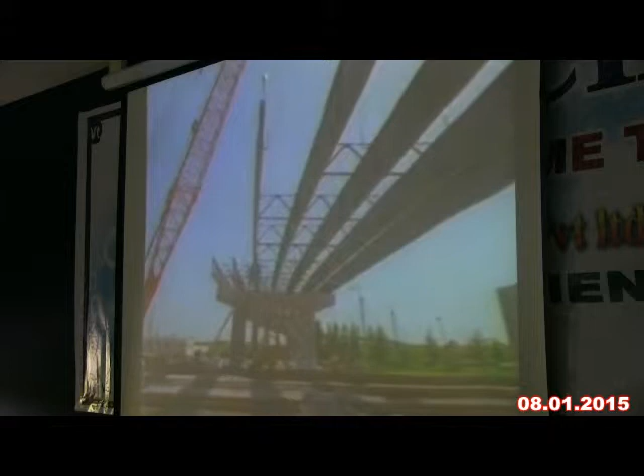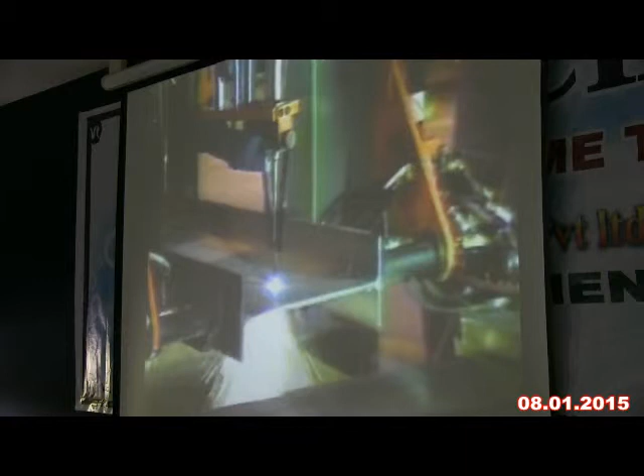Steel is light, yet it is strong enough to stretch across great distances with longer spans. Steel gives designers and engineers the ability to fulfill their most imaginative concepts with structures that would be impossible to build with anything else. Steel is not only durable and economical, it allows existing structures to be altered or expanded for new or greater uses. And because fabrication can be precisely controlled off-site, steel is fast to build, much faster than other materials, and it is buildable in any season.

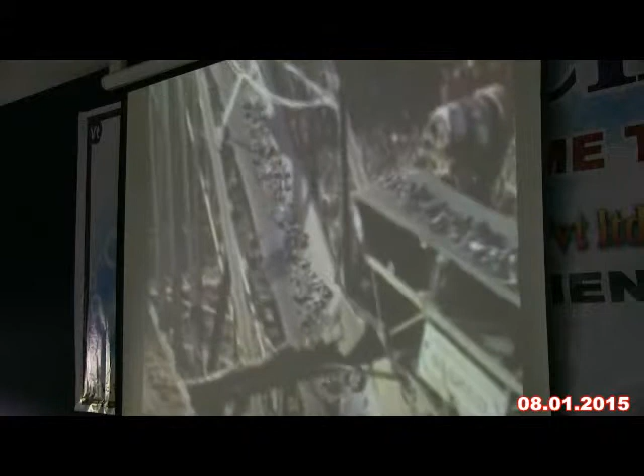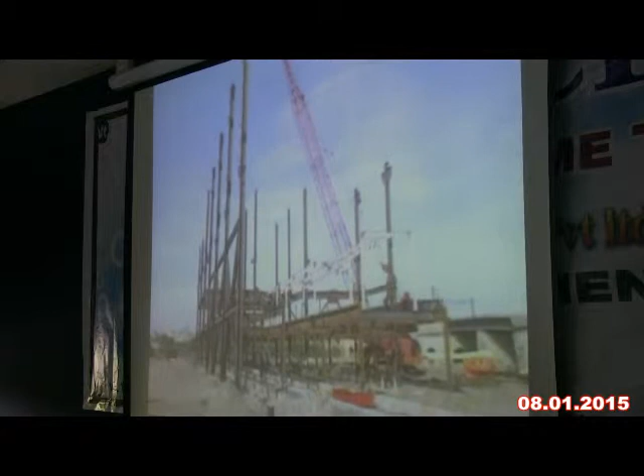Steel also helps preserve the earth because it is 100% recyclable, and it can be used again and again without losing any of its original strength. In fact, more steel is recycled than all other materials combined. Thanks to the power of contemporary electric arc furnaces, this scrap metal can be transformed into high-quality steel in little more than 3 hours. When it has been fired, refined, and processed, it can become powerful beams capable of supporting modern buildings or bridge spans.

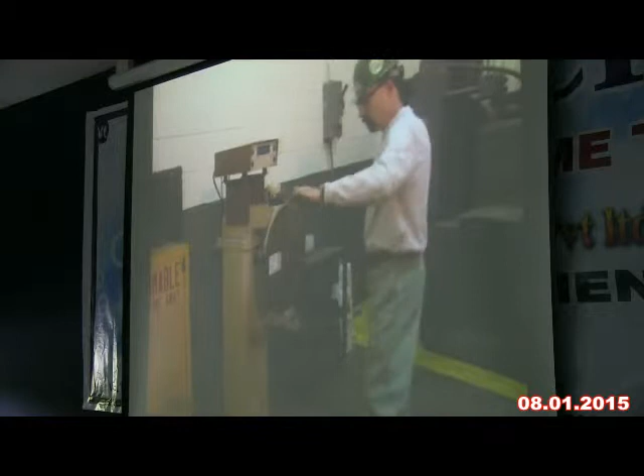This electric arc furnace, consuming about 75 megawatts of electricity, just melted about 125 tons of used cars and other forms of ferrous steel scrap in about 60 minutes. The electricity arcs between the carbon electrodes and the steel scrap in the furnace to produce a heat of molten steel. Once the scrap has been transformed into molten steel, specific alloys are added to create steel that has the exact strength and properties required for its future use. Each heat will meet the requirements of the steel specification ordered by the customer, related to the chemistry and composition.

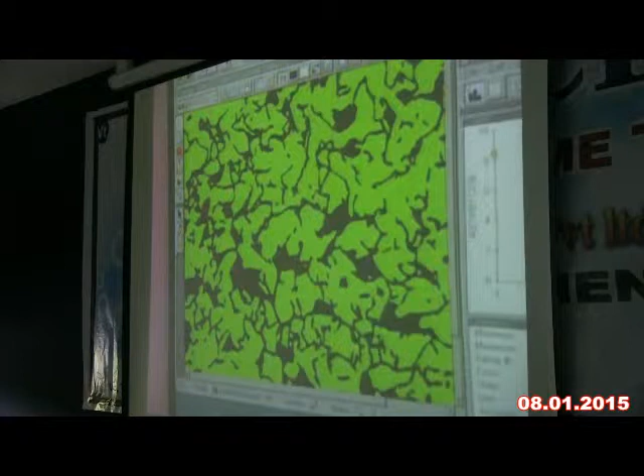Using electronic microscopes and spectrometers, inspectors scan the steel to ensure that every piece of steel has a uniform and consistent composition. Since the introduction of structural steel shapes, improvements in materials and design methods have made a profound difference. If the Sears Tower were built today, it would require 35% less steel than when it was built in 1974.

After the scrap has been melted, refined, and tested, the molten steel goes into a bathtub-like container called a tundish. The steel then moves through continuous casters, where it will be made into slabs, billets, blooms, near-net shapes, or beam blanks. In the continuous casters, the steel flows through nozzles into water-cooled molds, where it is cast into a continuous bar. When the steel comes out of the caster, it must cool to 1600 degrees in order to solidify.

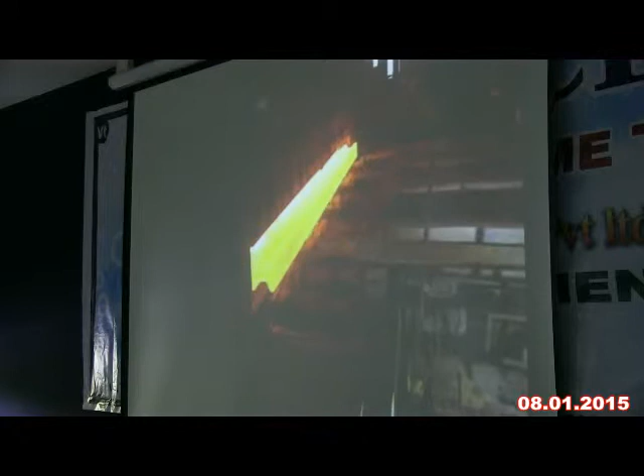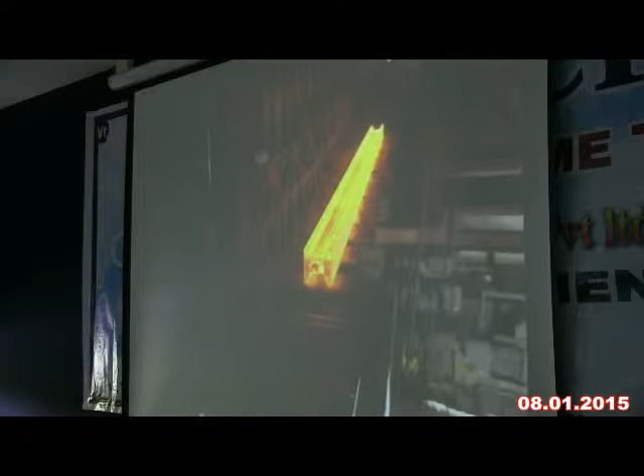When the steel is to be rolled or further processed, it will be brought back up to 2400 degrees before it completely cools, thereby saving the time and energy that would be required to reheat steel at a later time from room temperature. This process, like many others in the production of today's steel, is controlled by computer-driven equipment.

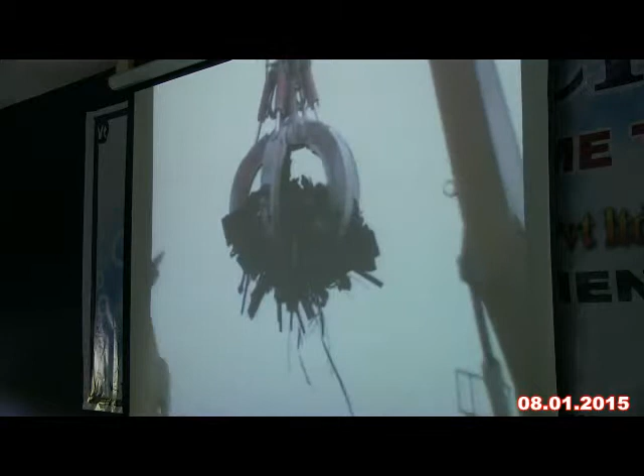The steel bar then goes through a straightener, and it will emerge as the finished product. Just think, only a little more than 3 hours have passed since this steel was scrap metal. It has been transformed into high-strength steel, saving our precious natural resources and preserving the earth through the use of recycling technology.

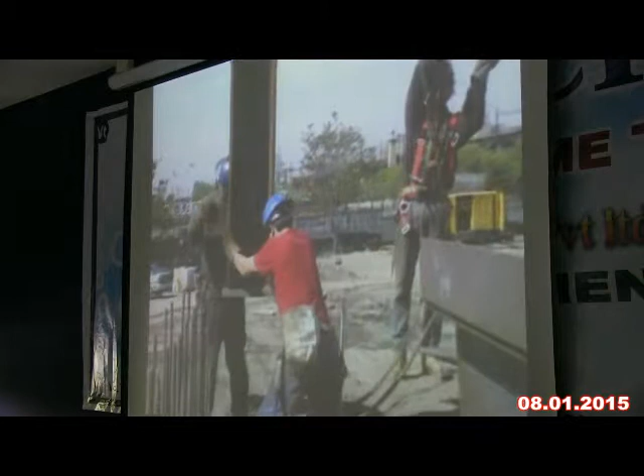After the steel has been produced, every piece of steel in a skyscraper or bridge must be precisely cut, its holes properly placed, its pieces welded in exactly the right location. Every single bolt in the structure must be located and attached at the proper place, and all this must be exact to 1/16th of an inch, so that the steel members will fit together perfectly at the site.

That's why a process called detailing is such an important and integral part of building today's complex steel-based structures. It is the detailer who must develop drawings that are so precise that they will show the fabricator the exact dimensions required for manufacturing the finished steel components that will go into the structure.

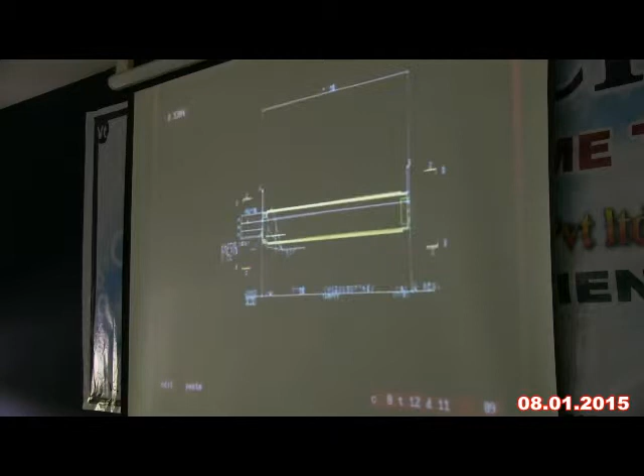To accomplish this formidable task, the detailer will take the design prepared by the structural engineer and on paper build a 2D or a 3D model of the steel frame of the building or bridge. It is from this model that the detailer will generate a complete list of every member in the structure, as well as shop drawings for all the individual steel pieces.

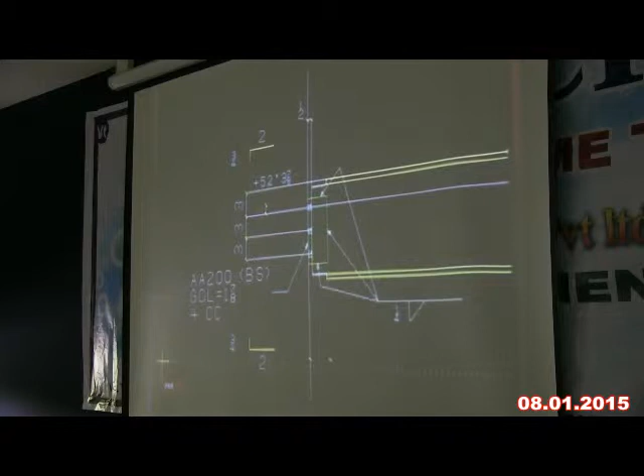To accomplish this process, the detailer must compute the length of the beams and columns, as well as the bolts and raw materials used. The detailer must also keep track of every hole in the entire structure. If a change is made in a beam connection or in the hole of one column web, it will be up to the detailer to indicate exactly how that change will affect all the holes in those beams.

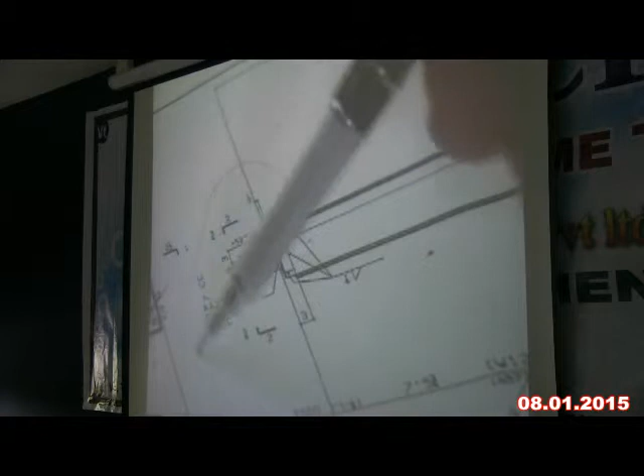In addition, if a member has been changed on the shop drawing, the detailer must also change the erection drawings that will be used in the field. All this information is developed with the help of computers, and it can be downloaded to the drill line in the shop or to the angle master to show them how to drill holes for the angles.

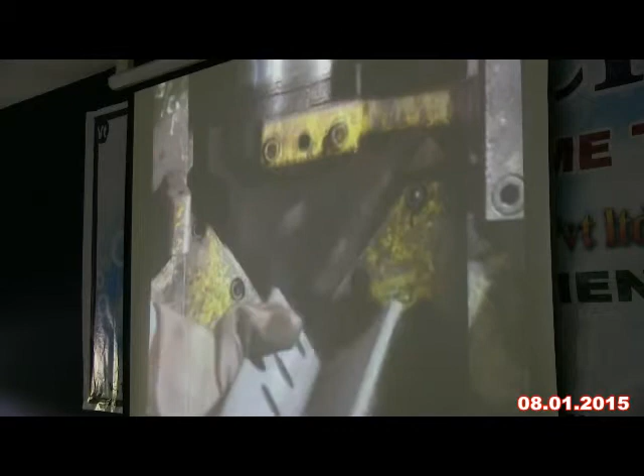But it's important to realize that although these critical tasks are done with the assistance of a computer, they are not done by the computer. The detailer's training, skill, and expertise is the key to the process. It is the detailer's ability to translate the engineering drawings of a large structure for the fabricator so that the fabrication shop will know exactly what must be done to prepare the steel.

The detailer will also indicate the preparation, cleaning, and painting of the materials depending on its specification. If that weren't enough, the detailer may also have to consider and take into account shipping requirements, sometimes even the cranes that will be used in the field, and how those cranes will load and unload members from the truck.

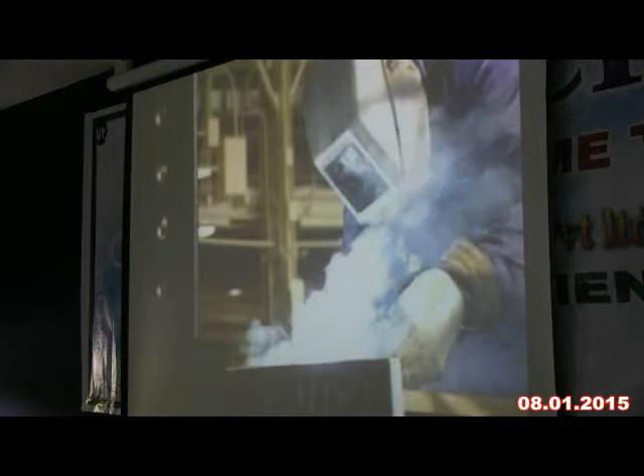Before the fabrication shop actually drills and cuts the steel members, the detailer must submit his shop drawings to the engineer of record for approval to make sure that the shop drawings are fully compliant with the engineer's design. It's clear that steel fabrication plays an important role in joining steel members, even before the beams and girders arrive at the construction site. This is one reason why on-site building with steel is so much faster than is possible with other materials.

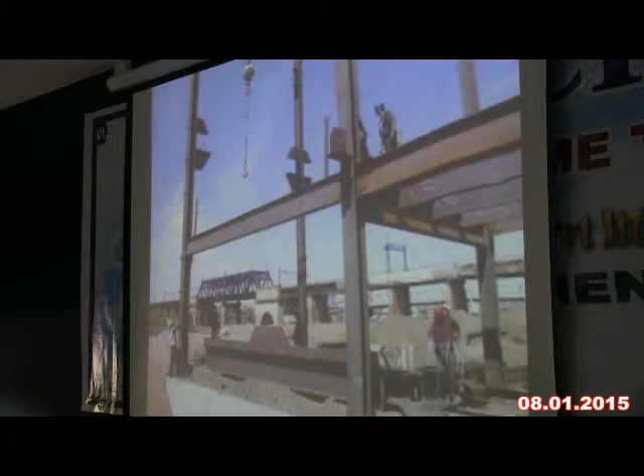At the fabrication shop, the steel is cut, punched, and pre-assembled as much as possible according to the detailer's drawings. These drawings can be used to generate computer disks that will drive the shop's fabricating machinery to cut and drill the steel with absolute precision.

If cutting is necessary, the operator inputs the size and the desired length of the member. The stock lengths of steel will enter the cutting machine by conveyor. An automatic arm stops the stock at exactly the right point, and the blade cuts the steel. The piece will then be labeled and rolled out.

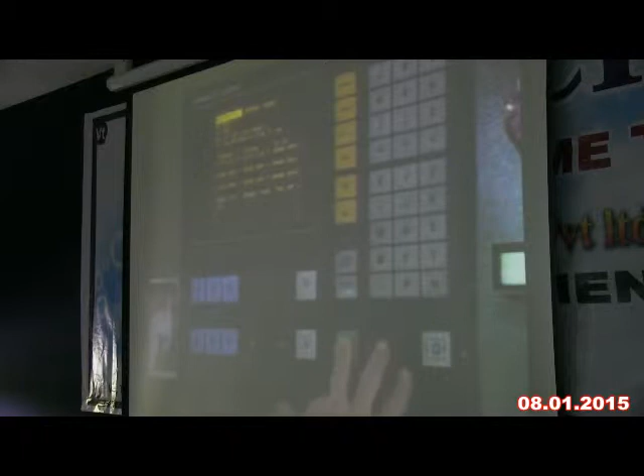From the cutting area, the steel members will travel on a conveyor to the next station, where holes will be drilled to make the bolted connections. Here again, these critical processes are precision controlled by computer. The machine operator inserts the disk into the computer as the member is fed through the drilling machine, pushes a few buttons, and the computer takes over.

As the steel automatically goes through the machine, its exact location will be monitored by laser measuring devices, so it will stop precisely where the holes must be drilled. All of the holes will be drilled in one pass as the column goes through the machine.

The operator is able to see different views of the member on a small monitor, noting the number, location, and size of holes needed, as well as the precise location of the drill bit. When the holes have been made, the member will travel on conveyor to the next station.

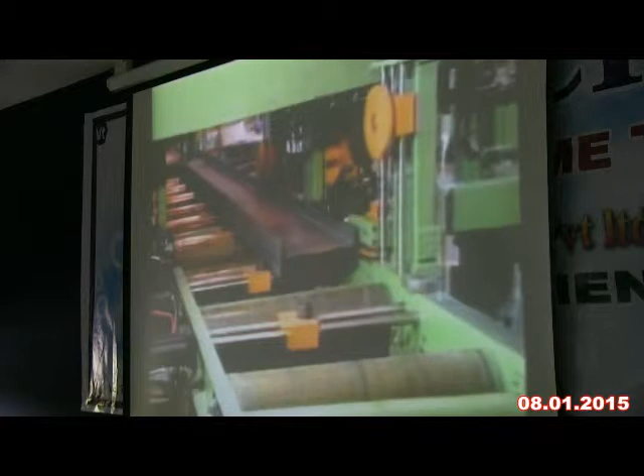The coping machine burns steel to cut members like a saw, or it notches the steel and makes holes. Here again, the operator inserts the proper disk in the computer to initiate the process, and the piece automatically stops at the location where the precise burning operations will take place. Usually, edges that are flame cut by the coping machine are smooth and require no additional work.

From here, the steel member goes to the layout station, where angles, plates, and other connection parts are bolted or tack welded. Today, high-strength bolts and welds have made joining steel members faster, more economical, and more reliable than ever before. If the piece needs welding, it will be taken to the welding area, where the welding can be done.

There are other areas in the fabrication shop where the pieces needed for joining steel members are produced. For connections that require angles, stock lengths of angles are automatically delivered to an angle machine, which will cut them to the desired length and punch holes at the appropriate locations in one pass.

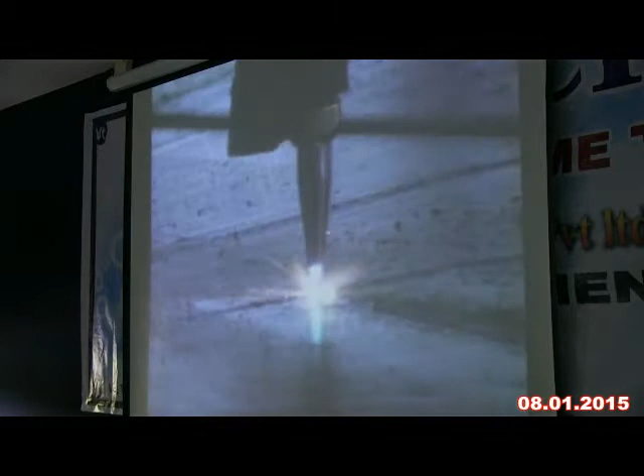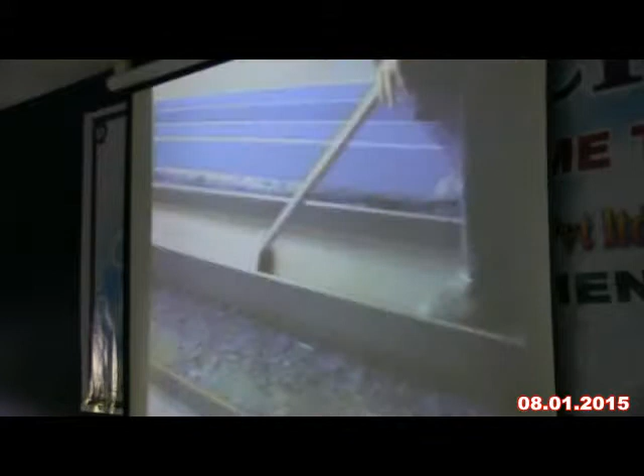Torch cutting plates is another operation performed by computer-operated machines in the fabrication shop. Shearing plates, punching holes, and bending steel members are other processes that take place at the fabrication shop. The piece may require cleaning and painting before being shipped.

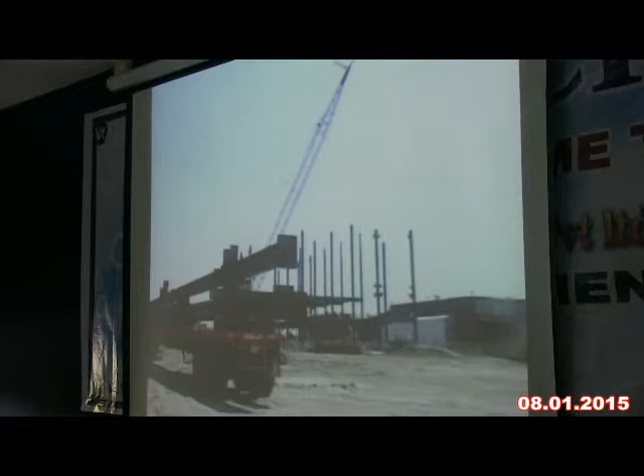When a piece has been through all the processing called for in the detailer's instructions, it is taken to the yard, loaded onto a truck, and transported to a job site or storage yard. Because there is often not enough space on the job site to store all the fabricated steel needed for the job, the process of delivering, hoisting, and placing steel has to be carefully planned so that the pieces will be delivered to the site in the order in which they will be erected.

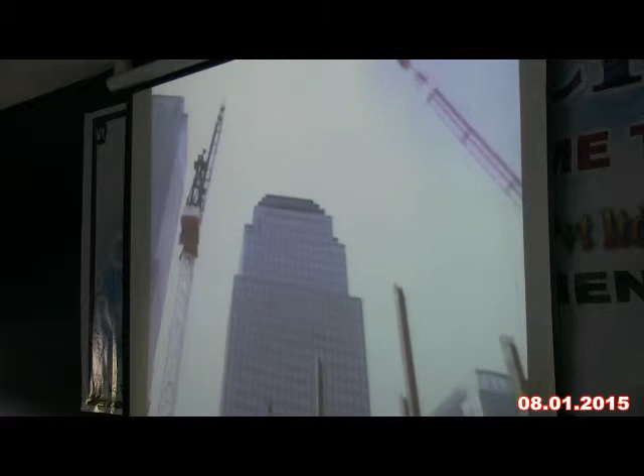Erecting a steel structure is a dramatic and often breathtaking process of assembling the fabricated steel members at the site. Frequently, these pieces will have to be assembled under difficult conditions, where it is not easy to maneuver them to align the holes and make the members fit. This is why precision in the detailing and fabrication processes is so important.

Typically, erection is done by lifting and placing the steel members in their appropriate positions, and then temporarily fastening them with several bolts or welds. At this point, the structure is capable of supporting only its own weight and cannot resist lateral loads. It must be temporarily braced so that it will not fall over during construction.

When a worker receives a member for erection, he lines up the holes by running a pin through them. Then he puts in several bolts and temporarily tightens them with his wrench. During this process, the crane operator plays a very important role. It's his job to deliver the steel to the exact location, often without being able to see it. At those times, he must rely on hand signals or radio.

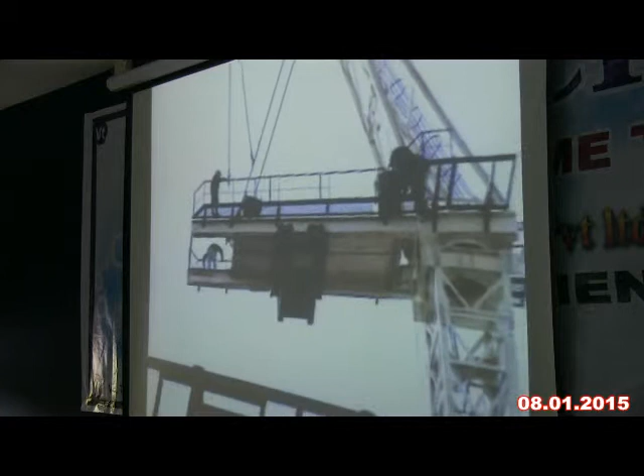When a section of the structure has been assembled, workers will permanently fasten the members with additional bolts and welds. The special wrench that these workers are using will stop automatically when the required torque is achieved, ensuring that the connections are strong. Erection of structural steel has always been challenging.

Many times workers have to assemble very heavy pieces at tremendous heights, with several pounds of equipment and supplies hanging from them. They may have to walk on steel beams hundreds of feet up in the air. But the industry keeps a strict eye on safety, and safety requirements require workers to wear fall protection harnesses that help make erecting structural steel safe.

The challenges of erecting steel structures aren't limited to safety issues only. Special conditions can require new and innovative techniques. For example, when extremely tall structures are being built, it may be impossible to find cranes that can reach the top of the structure from the ground. In such cases, self-lifting cranes may be used that can lift themselves as the construction proceeds.

In the case of the CN Tower in Toronto, the tallest freestanding structure in the world, a mast had to be put in place over 1,500 feet in the air. Lifting and erecting this heavy steel structure safely and accurately at such a high altitude in Toronto's cold winter was a tough problem. The solution was a helicopter. After several practices on the ground where pieces of the structure were pre-assembled, a special helicopter was used to lift and assemble the mast. This solution saved over 6 months of construction time.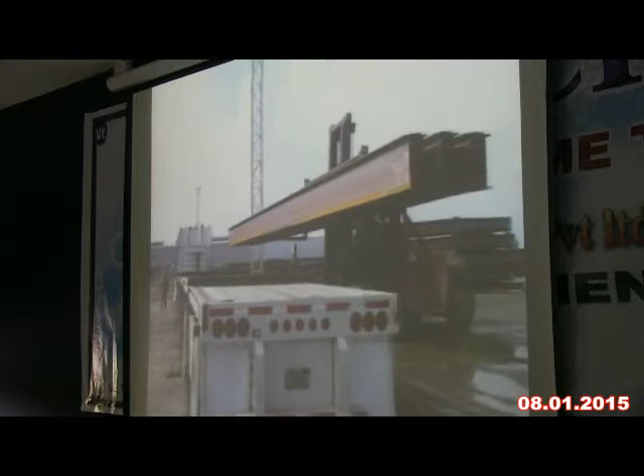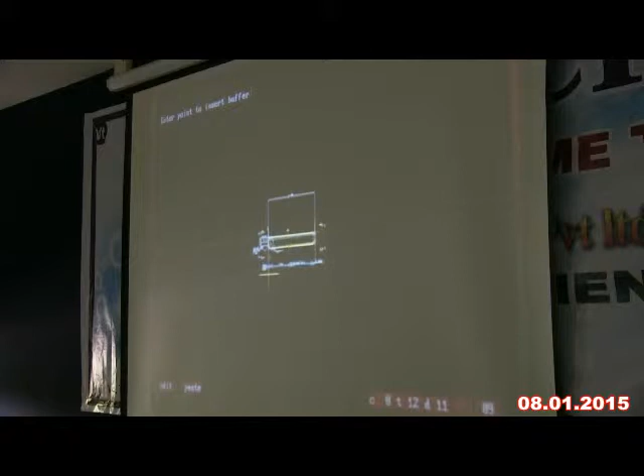Experts who can perform the complicated detailing that will transform an engineer's drawings into the specific requirements for each beam, column, and bolt. Then there are the experts in the fabrication shop who can transform raw material into fabricated structural steel. And the experts at the construction site who can erect the steel frames that form the core strength of buildings and bridges. These skilled people are all part of the team that share the excitement of building the miracles of the modern age.

All of you are familiar with drafting, right? And you also know about design. And the term detailing is something maybe new to you. Right? Detailing, have you ever heard about detailing? You may not have. And after seeing this video, now I hope you have some rough idea about what detailing is. So detailing is a kind of intermediary stage between design and fabrication.

It differs from drafting in the sense that in drafting you just follow, like an AutoCAD technician. So you will be simply drawing it. You may not be bothered about design aspects. Many companies will have draftsmen, and drafting is very old. It has got a good amount of history. So many times candidates graduated from ITIs and polytechnics do this drafting. Engineers do the design part.

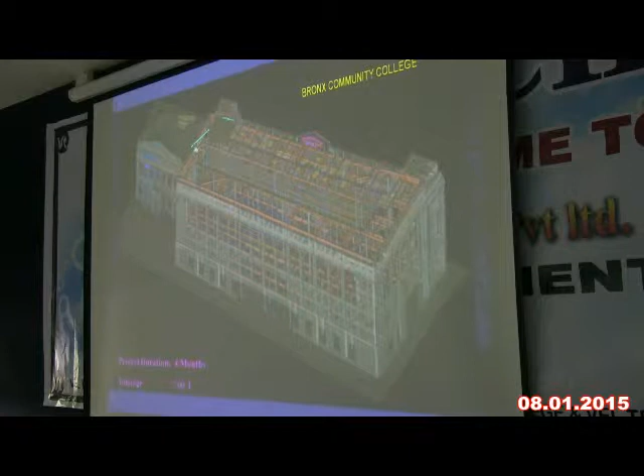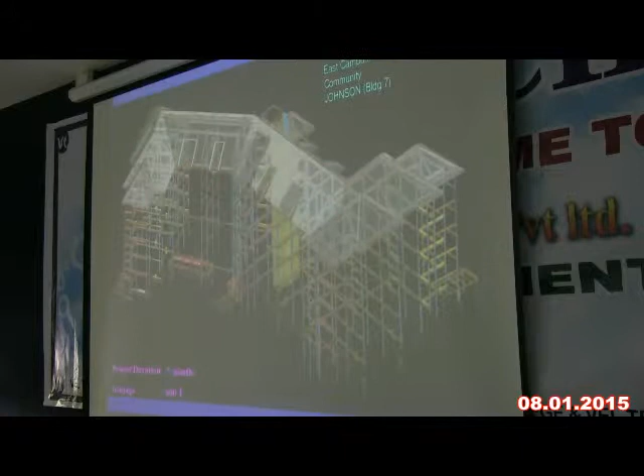We also have our presence in the US. We have sent people to give project support from the customer's place. You see the structural frame inside? Concrete and steel are the primary materials forming the structural frame of the building, and we take the steel part. So we are just going to run through it. These are the pictures, both the 3D model and the real photo.

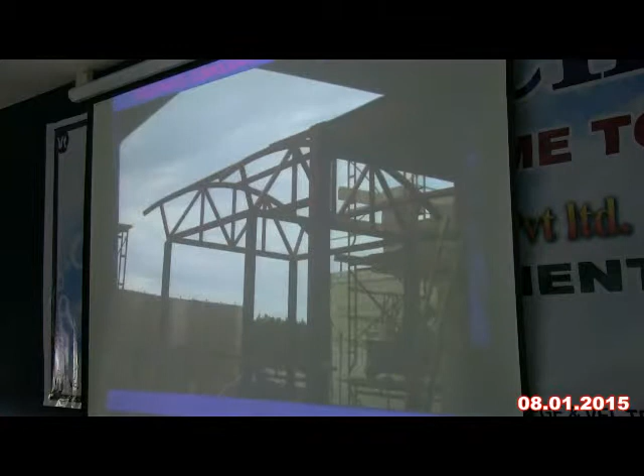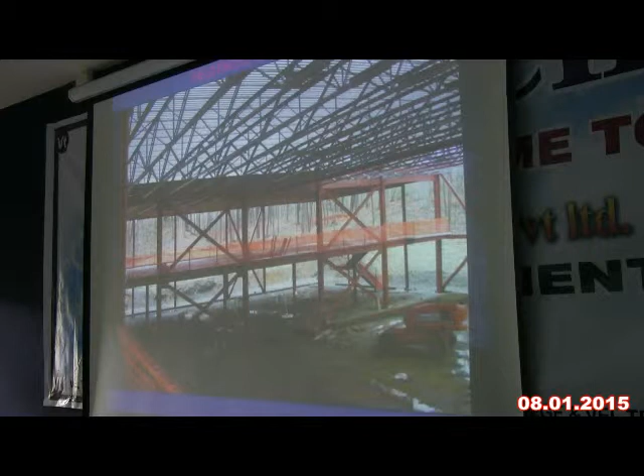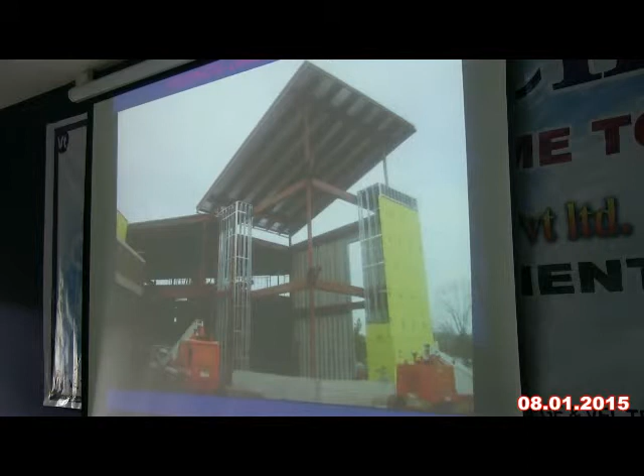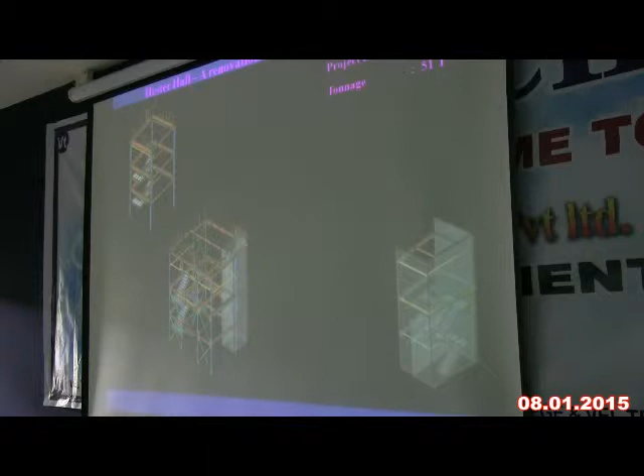Our projects normally have a time span of 2 to 3 months. Sometimes we have bigger projects going for 7 to 8 months also. It depends. And we also do building additions to existing structures and renovations. These buildings require a lot of coordination, meaning you have to talk to the customer about the existing conditions and the dimensions of the building.

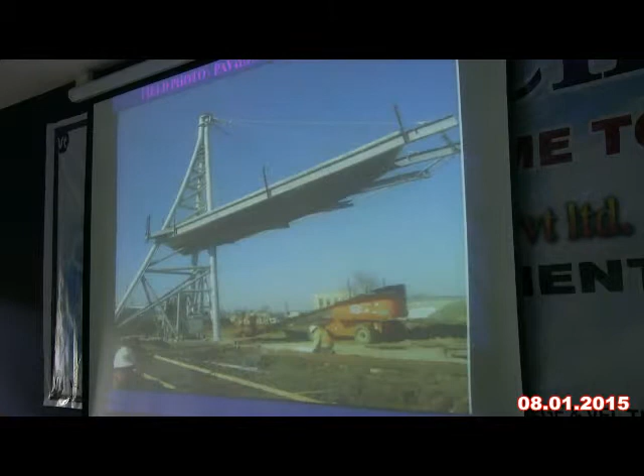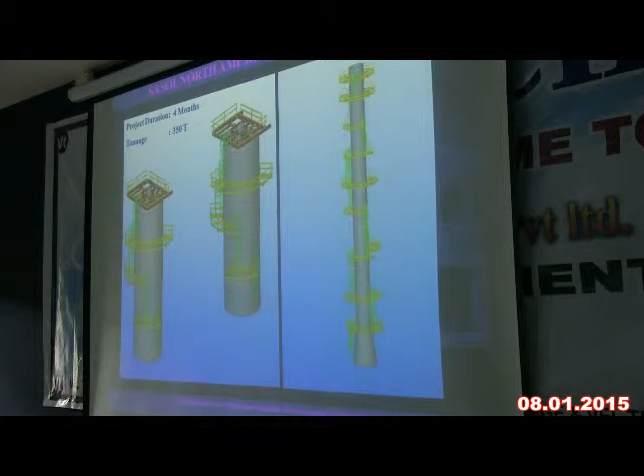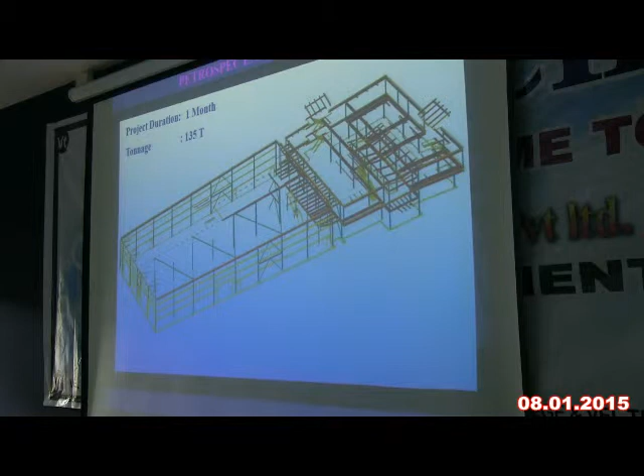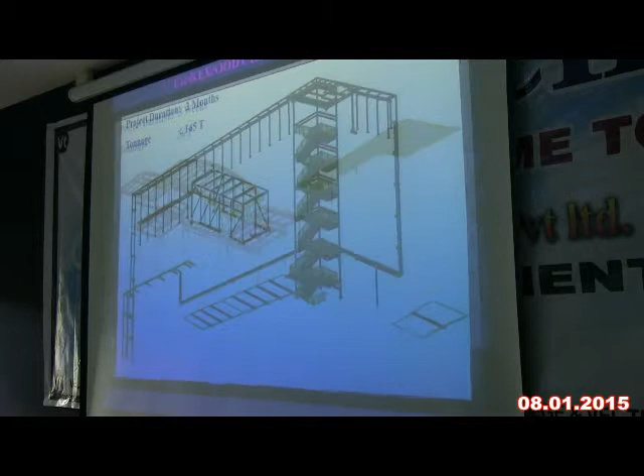Structures are categorized into commercial and industrial. Commercial buildings are like shopping malls and hospitals. Industrial structures include pipe racks. Very important. So for that, the supporting steel is the pipe racks. We do that for industrial structures. For industrial structures, we also have a good relationship with our customers.